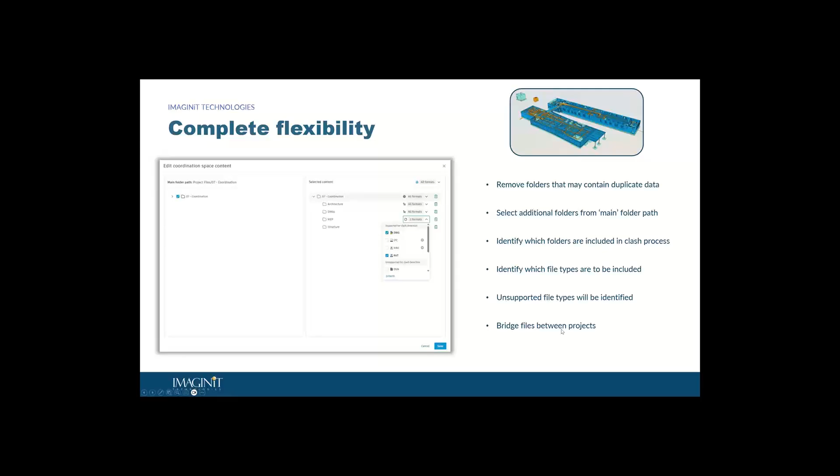And then Bridge, if you're not familiar with ACC, is a really powerful tool for sharing files between projects. So if you happen to be working with someone else who is also in ACC, you can just bridge your files back and forth to the predetermined folder for coordination purposes.

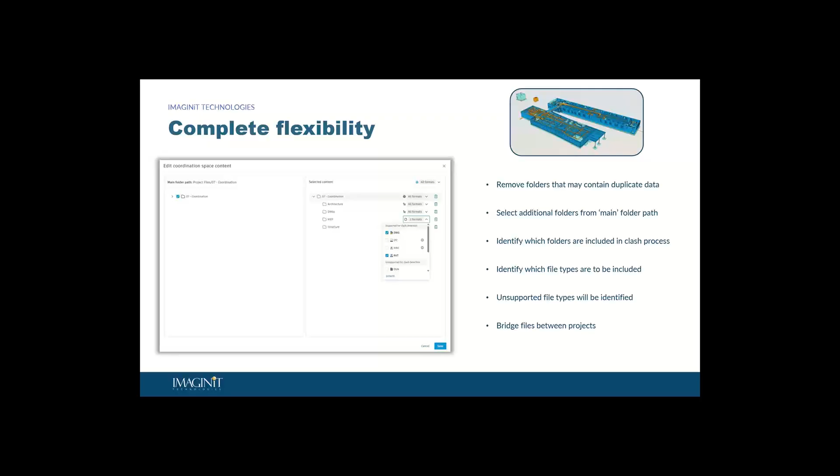Automatic clashing - this is probably where model coordination really shines compared to maybe a Navisworks workflow. I know there's a lot of people out there who are probably very in-depth with how to set up clash detective and rules and regulations, but it is time-consuming nonetheless.

Being able to immediately upload files into model coordination, and depending on how large and the level of detail the models are, you can get clashes almost immediately.

So I thumbed up 4 clashes from my electrical to, I think that's duct, right? And then I thumbs down the duct to structure, because it's creating a lot of clashes, 409, that we need to immediately click on and go through the workflow of determining what needs to be addressed, what can be considered a non-issue, and maybe what's not pertinent because you haven't been to that side of the building yet.

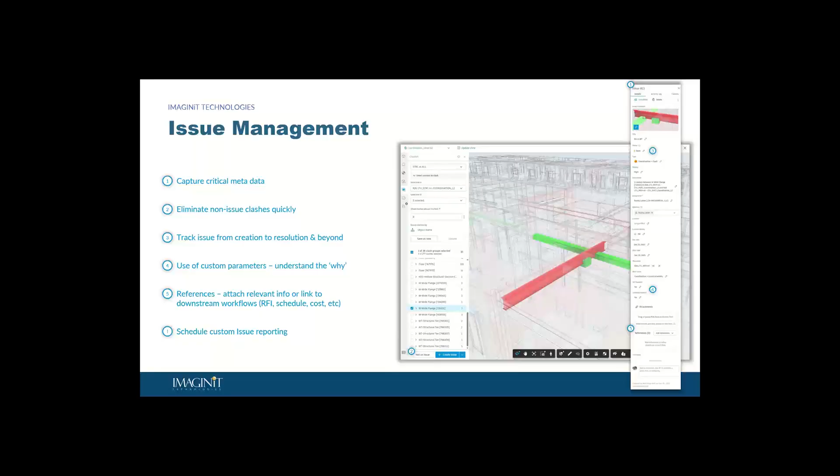Meetings is another tool in ACC that is part of model coordination and build that I think could use a little more love, specifically when we're talking about the coordination process. I've been part of many coordination meetings running through a Navisworks model, creating viewpoints and sharing out an NWD. It's not very effective.

There's less accountability, we'll say, in tracking issues and following up. Oftentimes you come back to the meeting and not much was done that you were expecting, so you take half the meeting to regroup and then move along, and it just prolongs the coordination schedule, which doesn't really work because the schedule is what it is, so you just truncate everything to the back end.

With meetings, you have the ability to set agenda items. You can reference install documentation, sequencing plans, and if you're doing concrete work, you can assign these agenda items out and track them. This really sets the stage for buy-in on all parties and creates that transparency to track and identify potentially trade partners or modelers who need a little bit of help.

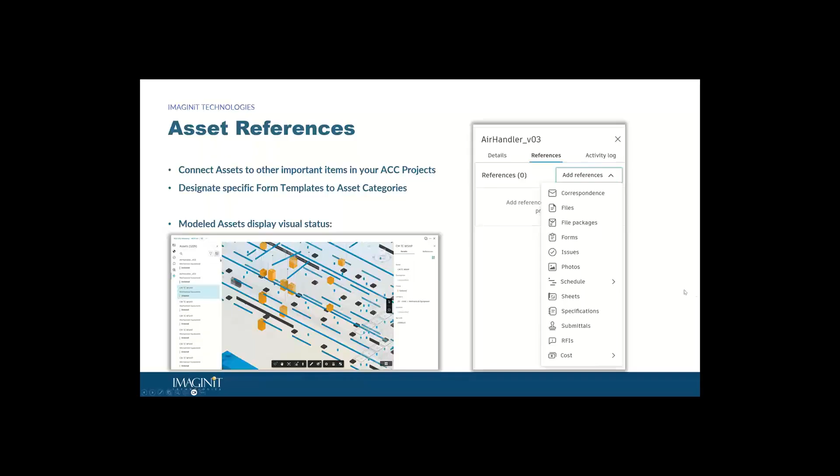And last but not least, Matthew had this in his coordination slide as well, the dashboards. Because ACC projects really do serve as a database of information, anything that we're storing, including those custom fields and custom statuses that we tie to assets, we can develop very robust and individualized dashboards via Power BI to do some really nice reporting that is dynamically updated.

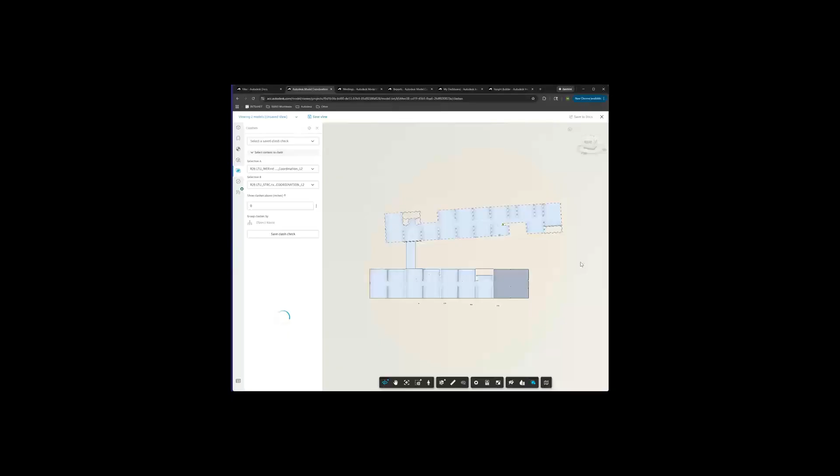I only care about level 2 models for right now. Then I can actually see the big offenders. So if I select structure and plumbing and click on that, it's actually going to load those 2 models and show me all of the clashes that are already pre-clashed for me.

At this point in time, if I only cared about these 2 models with no context of anything else, I could go through the issues, the clashes, and assign them out. Or if I want to see everything in context of the other models, I would probably go into my predetermined views and then launch the level. And so this is going to load all of my federated models together and still give me that auto clashing.

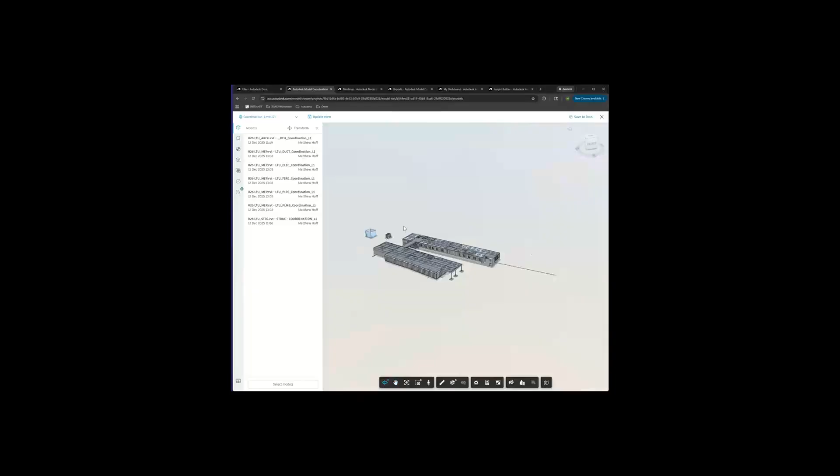Now that I have my model loaded, I can see what's in here. So I have electrical, fire, pipe, plumbing, structural, and duct. I can add more levels so that whenever I set up my clash as levels, it's always the conversation of, well, I want to see below or above levels as well in context.

And you certainly have that flexibility at any time. You can come in here and select models and load in the rest of the levels if you want. So you certainly have that flexibility to see anything above or below.

But then if I go down to the clashes, this is where early on in model coordination, it was actually very different than Navisworks. But there has been more and more features added into the functionality of model coordination to kind of really bridge the gap, if you will, of what BIM 360 Glue used to be back in the day, to now a very robust platform that you easily could spend all your coordination efforts in here and potentially not even touch Navisworks until it's needed, maybe like on a hospital or really coordination heavy project.

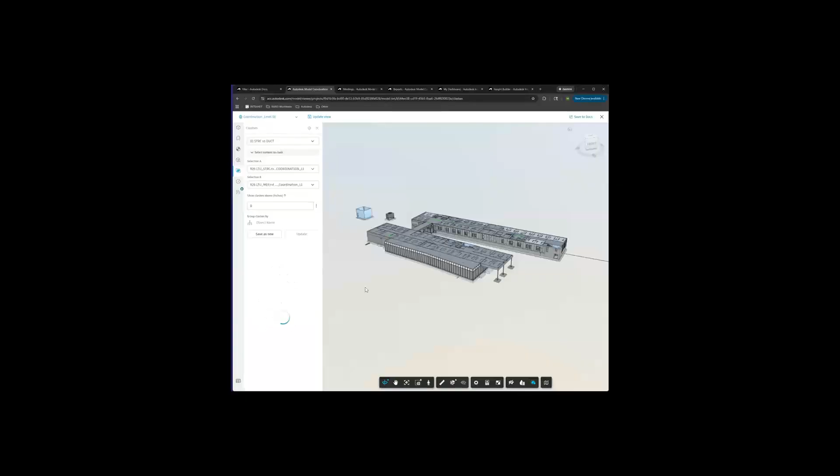So I have the ability to, first, select my model. If I want to select structure, I can select structure versus all, or I can just focus on a couple of models. Once I do that, I can save that as a clash check. So then I can just go back to my structure versus duct. If I have some kind of a tolerance, if I want to give it a half inch of tolerance, I can do that. Or I can just do a hard clash at 0.

As you can see, it found 28 clashes in 11 groups, and it's right now grouped by object name. I can come in here and change it if I don't want the object name. For instance, if you're dealing with Revit models and maybe you have a shared parameter under identity data or something, you want to group by that, you could. You have a lot of flexibility on how to group the clashes.

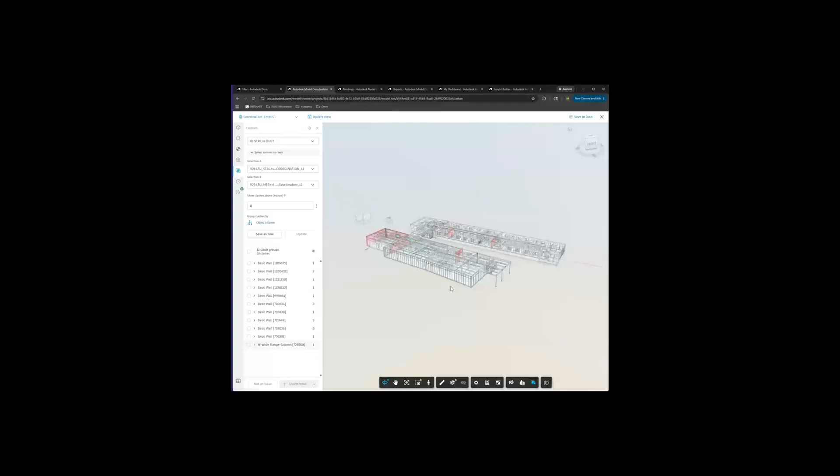And so after you have identified clashes, it's as easy as clicking on the clash. In this instance, it looks like an electrical box just resting against a column, and so that, in this case, is not an issue. We can say, hey, that's a valid interface, and just mark it as non-issue and clear that clash out.

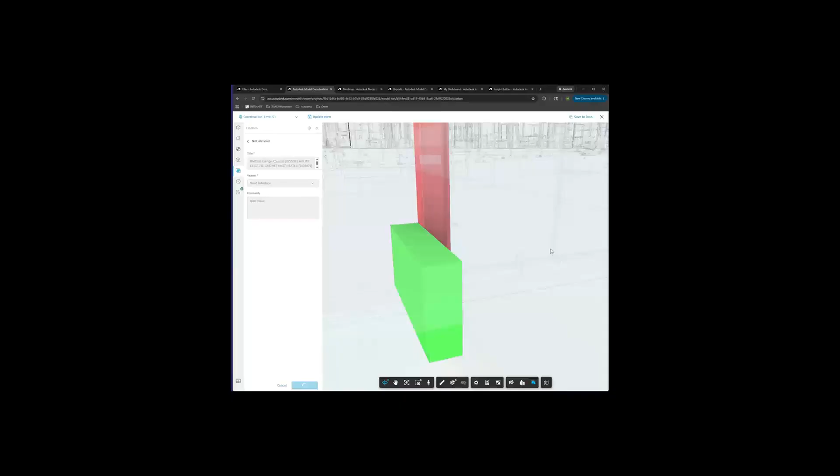And so if I go back to a different level real quick, I'll show you the difference of doing it one at a time versus, let's say, I would just want to do structure versus all and get everybody all at the same time.

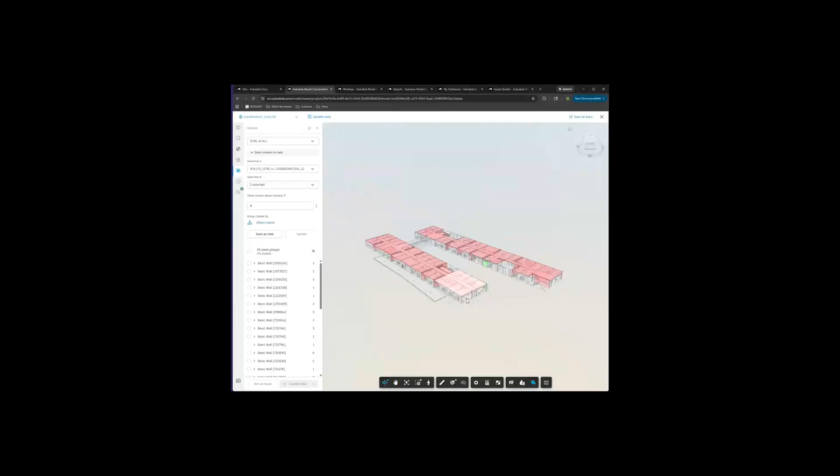The value for this, and what's kind of a little bit different and hard to do in Navisworks, is having an element that is offending by multiple disciplines. So like a structural beam where fire protection is hitting it, plumbing's hitting it, maybe duct is clipping it as well. Being able to address that all at the same time versus finding all of those clashes one at a time and addressing them separately is really powerful, especially if this one trade can move and alleviate all of those clashes. You can save a lot of time.

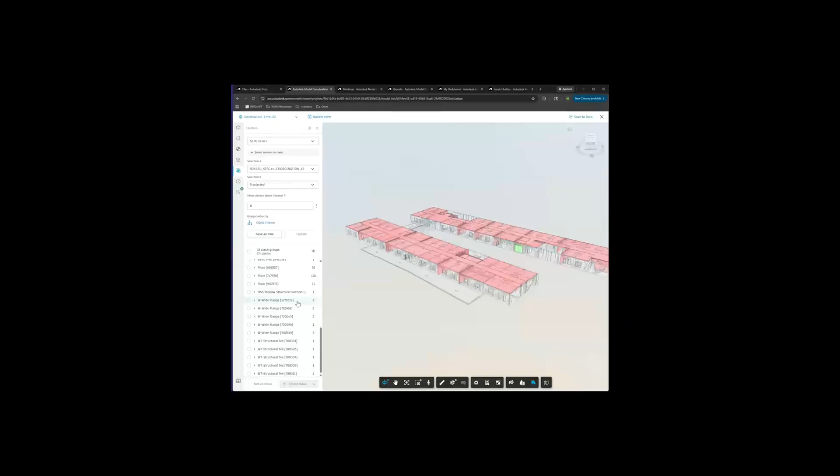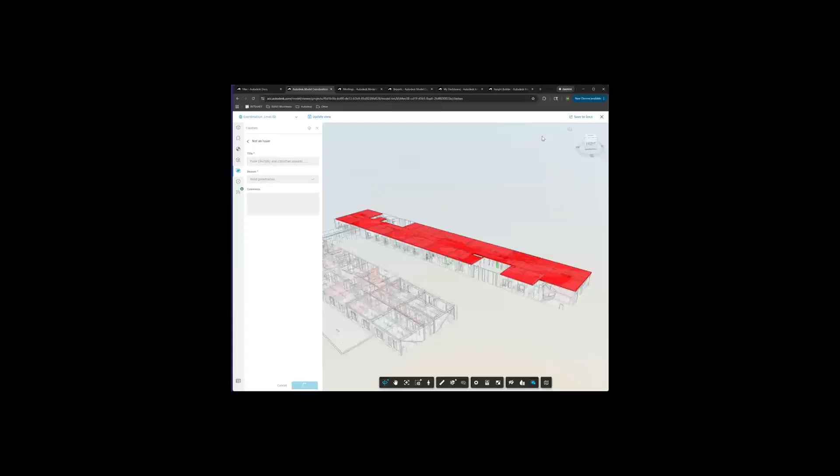The other aspect is, let's say in this case, as you see, there's 274 clashes, and 110 are floor clashes. So if we know we're not coordinating floor penetrations, this is a non-issue for us. Again, with that non-issue button, I can clear out 110 clashes with one click. Now if I go back to my clashes, it should update. So now we're down to 164. You can see, conceivably, as you go through the coordination process, how much faster this could be to identify really the main issues, clear out the non-issues, and get to the meat of the issues.

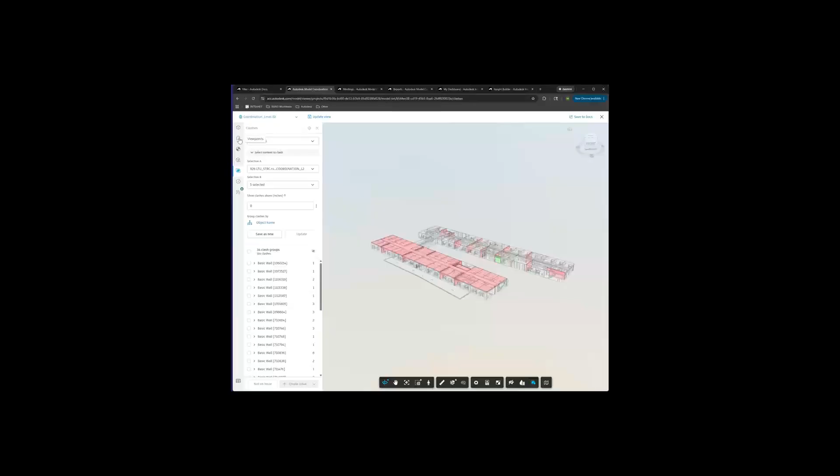Another aspect, I don't have a viewpoint in this one, so I'll change to coordination level. Actually, let me go to level 1. My apologies. If you have areas of concern that are coordination heavy, like a mechanical room,

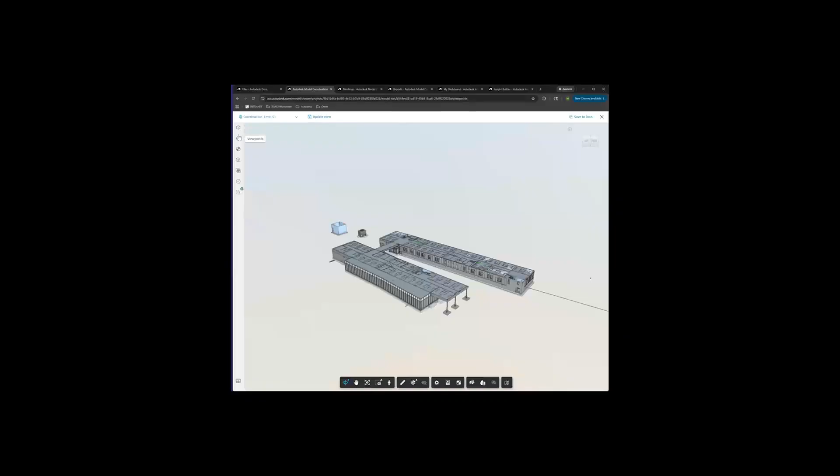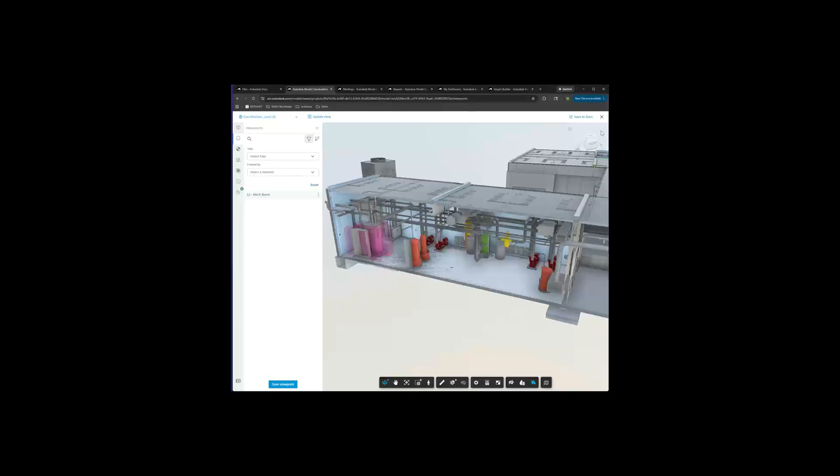rooftop, those sorts of scenarios, you can always come in here and create those viewpoints and save them. So you can come back to those spaces for coordination purposes, for sharing out, and have that saved, just like you would in maybe a Navisworks or a third-party workflow. Really powerful for sharing out specific areas of need that you come back to frequently throughout the coordination process. One last thing before I move on, check on time.

I'll hurry up here. The ability to save to docs. This is connecting office to field. A lot of times these coordination models are really important to have in the field to validate as install is progressing. As you save to docs, it saves into a folder that you designate, and it'll save a snapshot of that coordination model that can be viewed on the mobile app. So there really is a mobile side to the model coordination, and that's where docs is really utilized out in the field.

Quickly touch on meetings. This is something I struggled with when I was in industry - documenting, tracking, holding people accountable for getting clashes resolved on time, and not coming to the table with silly clashes that are no-brainers.

The ability to set agendas for meetings and then be able to pull from issues that are created, and assign them - so I can assign Vince to provide a shaft coordination update next week. That's ongoing. We have an RFI that we're tracking, we're still waiting on information. Let's say hanger data, we already supplied that, so we're going to close that out.

Now if I go back to the meeting, back to my coordination meeting - let's say this is the next week and we're having a follow-up meeting today - any closed items will fall off your meeting agenda. So you can easily track what's been accounted for, what's new, what we're still tracking. It's really a transparent way of coordinating, keeping track of all the issues.

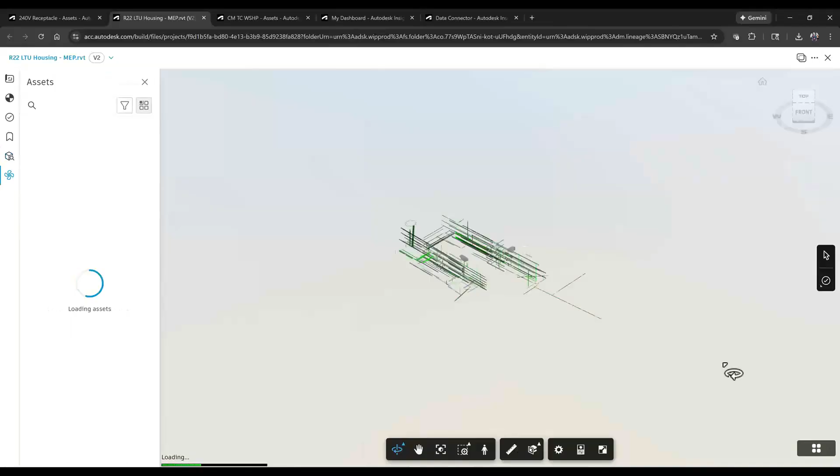Within the model, so there it is. It might not seem like it, but the status of this is called specified, meaning this receptacle is spec'd in the project specifications. It's kind of a standard, the default initial status with the default status set.

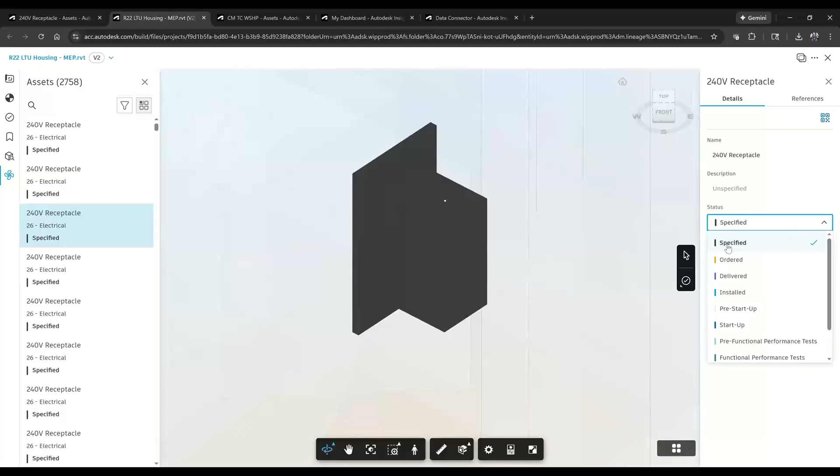But if I wanted to click on that and say, hey, those receptacles in that particular room were installed, it's going to change the color of this. And if I zoom out a bit, we should be able to see all of the different elements that I've already preemptively associated statuses to. So we have a bunch of mechanical equipment that I labeled as ordered, got some light fixtures in here that are labeled as installed.

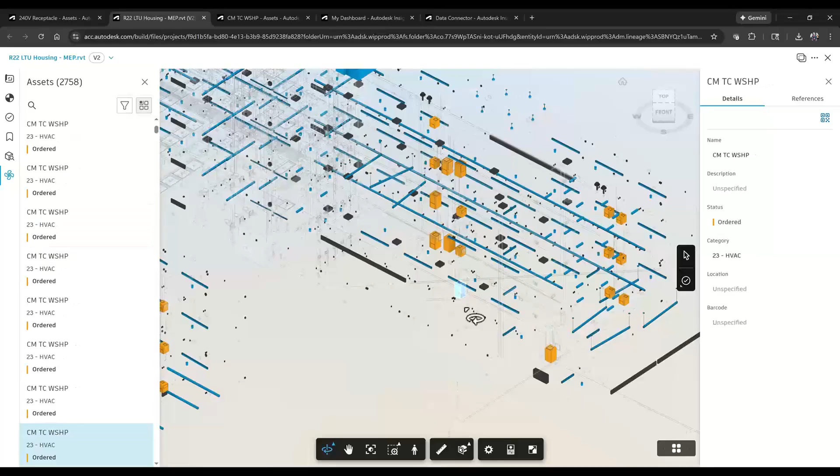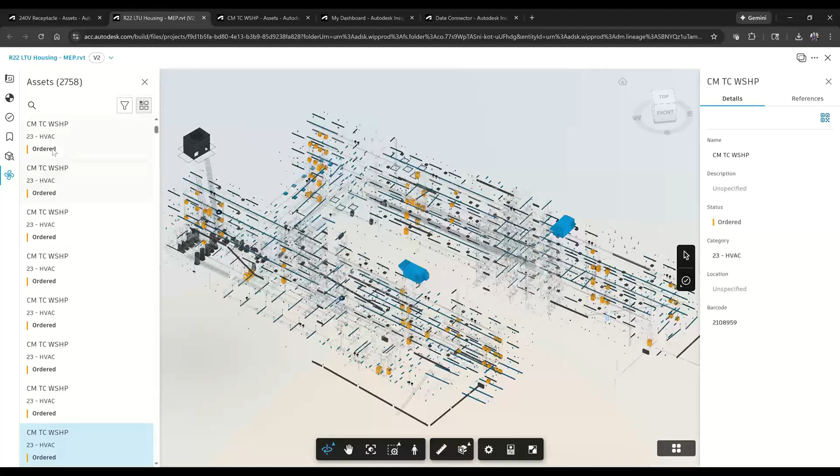So this gives us a decent visual of the project model. Like Matthew was showing, we can set up different views and have different saved views to filter down to elements. We can even do that in this assets view. So if I wanted to say, hey, the category is just electrical, I can filter down to that category and it's going to hide all of my mechanical stuff.

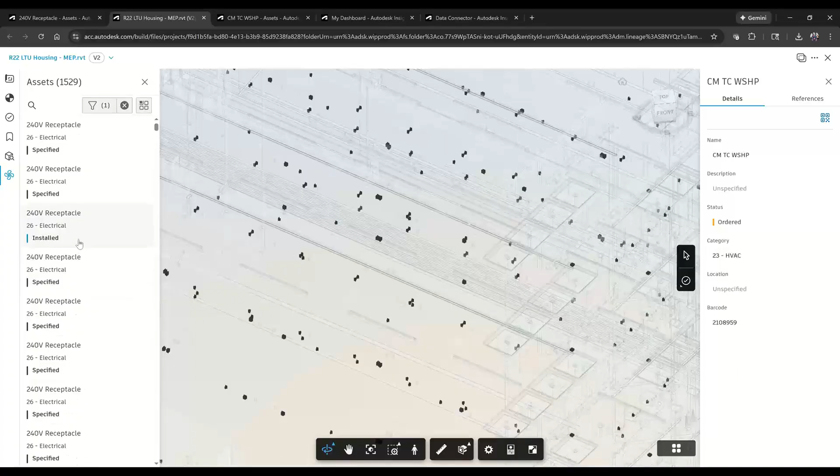I don't know if I just—oh, why did the light fixture status stuff get removed? Maybe I filtered it down, oh I didn't include the lighting thing. So there's probably one little blue receptacle in here somewhere that shows it's installed. But you can use this as a visual reference to just kind of see what the progress of all these mapped assets is.

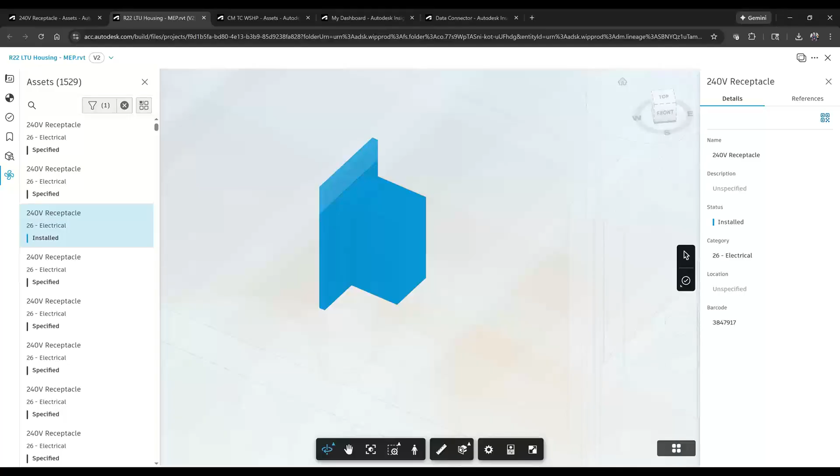And if you're utilizing this, if your field teams are utilizing it properly, there's a lot you can do here. There's a lot more that I want to show, but I realize we're three minutes from two, and I want to make sure that if there are any questions, we have a minute to address them. Probably what we'll do in part 2, I'll just kind of tee this off. Doesn't look like there are any questions, so I'll just wrap up this portion now in respect of everyone's time.

And I'm going to do this from this current slide—the presentation's going on my other monitor, so I'm not going to change it. But basically, for part 2, our plan is to follow up with these workflows and tie all of this model, these model elements and model management, into a work plan—tying this through schedulable and task-driven items. So that will be the focus on part 2.

But since there's still a few things I wanted to demonstrate and show with assets, we'll probably lead off part 2 with just the conclusion on the assets portion, and then we'll roll that into the work plan stuff that Matthew and I plan on showing. So if this is interesting to you, part 2 is really about closing the loop on this coordination chaos that we all have to deal with, and hopefully you get to see the big picture—the life cycle management from design coordination, model coordination into the asset management, and then managing those assets through a work plan that's associated to the timeline of the project.

So we'll incorporate things like precursors and predecessors to those work plans. We can associate items based on their status to those work plan items. So Matthew and I have a really good plan in place for part 2, which is occurring February 4th. So if you are free, we encourage you to register for part 2 of this. And I believe Lori will wrap us up here, but I think this part will be recorded and shared to our website. Awesome.